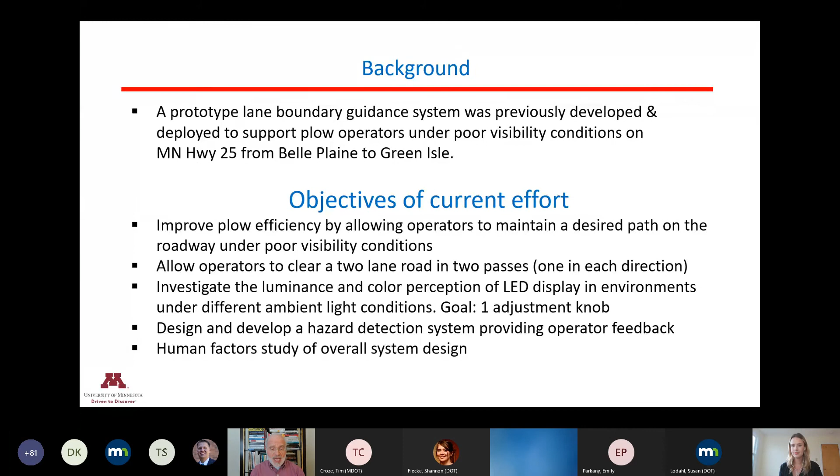This newer version essentially still has a differential RTK GNSS system. We are picking up correction signals from what's called the MnDOT CORS system, continuously operating reference stations. There are about 100 plus reference stations across the state of Minnesota that will provide us with accuracies on the order of a few inches. We've reduced the cost of the computer. We're now using a Raspberry Pi, which you can buy at Amazon for under $100. So we've brought the cost down quite a bit.

But I tell you something, the Trimble receivers that we're using are still very pricey. But we've recently tested and evaluated a newer system that cuts the cost of that by 75%. If I can have the next slide, please.

These are the components of the systems that were being run on Minnesota 25. I can't control the cursor, but on the upper left, you see an antenna from the GNSS receiver. The LED displays on the dash in the lower left. And the yellow box on the right, that's that receiver. If you went out and bought it today, that would cost you $16,000 for that little yellow box you see there. Trimble wants to get paid for their technology. And I want to let you know that we've evaluated a competitor to Trimble, and we find that it's just as good for about $4,000. So we think we can drive the cost of everything down quite a bit.

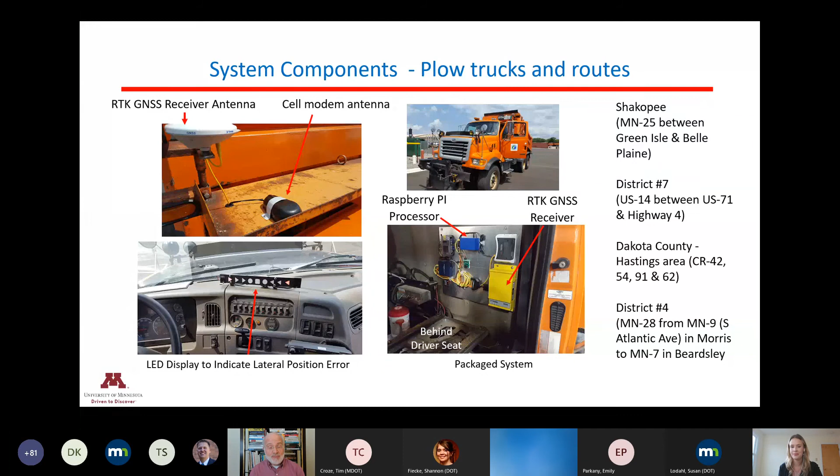If I could have the next slide, if we can click that again, you're gonna see LED operation. These are different colored LEDs and different shapes. The green represents being in the center of the lane. If you move 1 foot over, different LEDs are triggered. So each LED represents 1 foot of lateral movement. The truck is now going to move over into the opposing lane. And you can see that the driver is being warned that they're in the opposing lane and they drive back into their own lane. If I could have the next slide,

color is a huge deal, and different colors have different effects depending upon ambient conditions. For example, green is uncomfortably bright compared to red at night, but during the day, green is too dim compared to the brighter red. So at different ambient light conditions, different colors have different effects, and the operators wanted one knob, but we can't just fix it with one knob.

So we developed a series of experiments with human subjects, literally a black box where we enclose people in different ambient light conditions to see how they reacted to different colors. And we developed some equations, if you will, that we programmed into our computer. So we controlled each color independently of each other color for each LED, and we would change it depending on ambient conditions. So it would be different at night and different during the day, and the operator had only one knob that they needed to worry about. So that worked really well, and we've deployed that in the system that we're evaluating now on 4 different plows. If I could have the next slide.

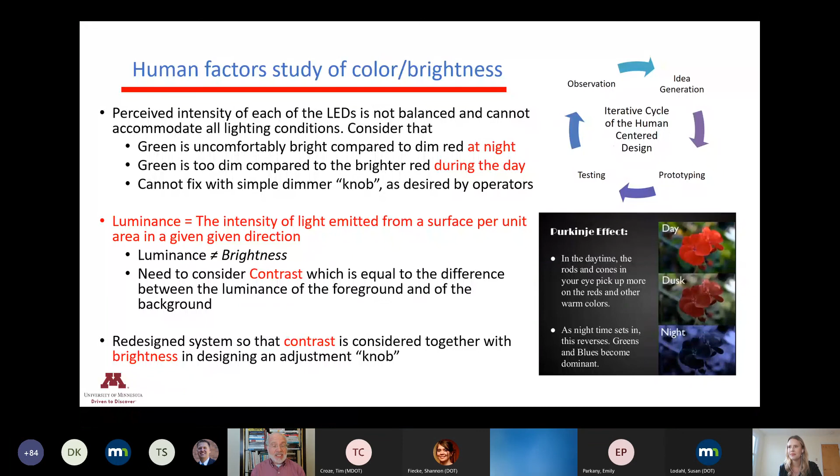There are 4 plows deployed now, 1 in District 7, 1 in District 4, 1 in the Shakopee area, and 1 in Dakota County. On the upper left, you'll see a radar mounted on the L bracket. The 2 antennas are on the side. Just below, on the left, you see the new LED display. And besides these colored LEDs at the bottom, there are 3 bars that essentially represent whether there's a hazard on the left, in the middle, or on the right lane. On the right side, you'll see that operators sometimes want the display up near the sun visor as opposed to being on the dash.

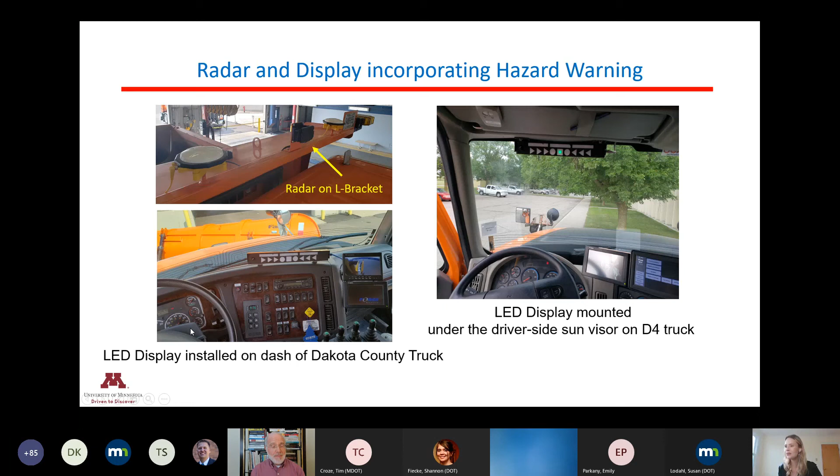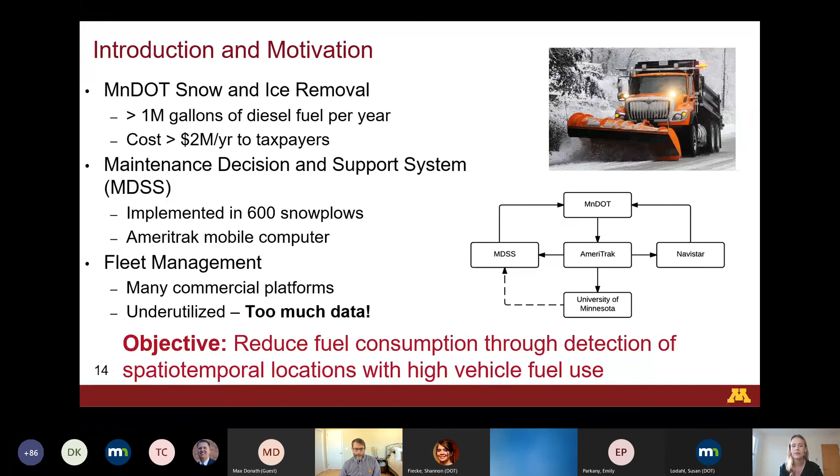So in fleet management generally, there's a ton of commercial platforms out there to do what we call telematics. Often the data are way too much for people to handle. So fleet managers don't have the time to scroll through terabytes worth of data to understand trends. So the purpose of our project is to interface with some of the data that are coming from these vehicles with the objective to reduce fuel consumption through detection of what we call spatiotemporal locations with high fuel use. So spatiotemporal just means in space and time. So the idea is that we will interface with data that comes from the snowplow in order to detect certain features about the roadway through the data that we're collecting. Okay, next.

So as part of our project, we're using the data to identify certain areas and times where fuel consumption is high. One of those particular areas is the issue of idling. MnDOT and MPCA have goals for reducing idling in vehicles and reducing CO2 emissions, respectively. So idling is of key importance and is considered low-hanging fruit in the fleet industry for reduction of CO2 emissions and fuel consumption. So right now, externally, MnDOT reports about 29,000 gallons of fuel consumed in idling in the 2017-2018 timeframe. If we define idle as being where the RPM of the engine is greater than 0 for greater than 3 minutes with 0 speed of the vehicle, we can identify from the data that we're collecting the times and places where idling is occurring in the fleet.

So we've collected a number of different data from different winters, from 2018 to 2020. In the 2019 season, we've collected a partial fleet from this season. We found that about 4.5% of fuel consumption is during idle periods of the vehicles. So about 4.5% of all the fuel burned is during idling, so essentially vehicles sitting there.

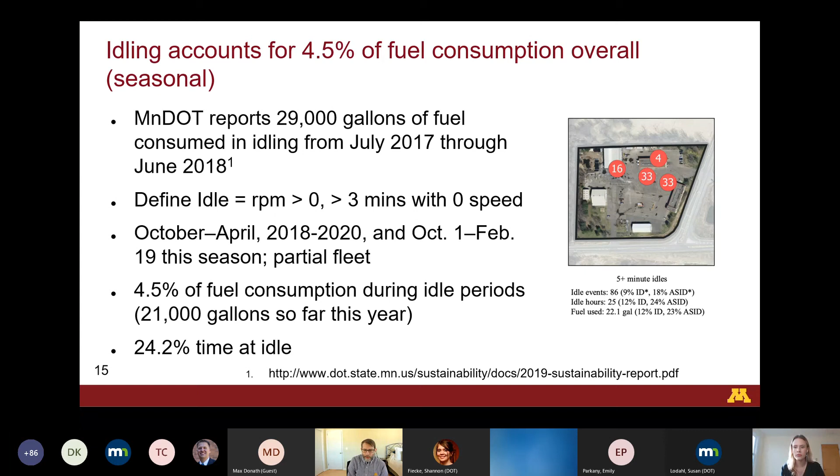And up on the right-hand side, you can see a figure where we've identified idling events over the course of a season, where these different places represent idling times greater than 5 minutes. And we've also done 3 minutes plus or 20 minutes plus, sometimes 30 minutes some of these vehicles are idling. So this is obviously an area where we can identify where idling is occurring and help the fleet manage where to reduce it. Okay, next slide, please.

But we considered only high activity days, meaning days where considerable snowfall was there, and also district aggregated weather observations. So we can show that if there's more snow, then there's lower miles per gallon. Now, what's interesting is that we can use this information that snowfall increases fuel consumption to look at specific locations where snow is highest. So you can go to the next slide, please.

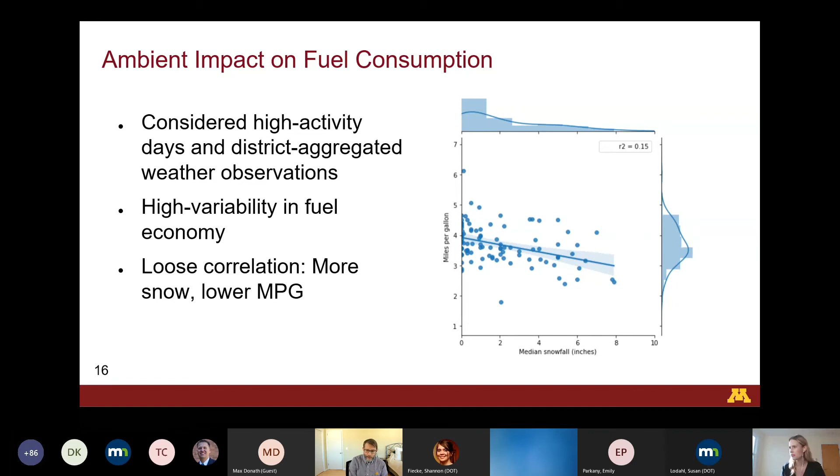So MnDOT has also already categorized some areas where there are snow traps, where there's excessive snow. We can actually correlate fuel consumption with the snow trap locations in individual vehicles, such that we can identify what fuel is consumed in the snow trap areas. We're working on this right now, and we don't have exact quantifiable numbers as to what the increase in fuel consumption is due to snow traps. We can categorize that, or we can do the reverse, which is use the fuel consumption to figure out where snow depth is high.

And so this is something we're working on towards the end of our project with the current winter data, though we haven't had too many snowfall events in Minnesota this winter, but I think we can still get something interesting out of it. And winter's not over yet, I'm sure.

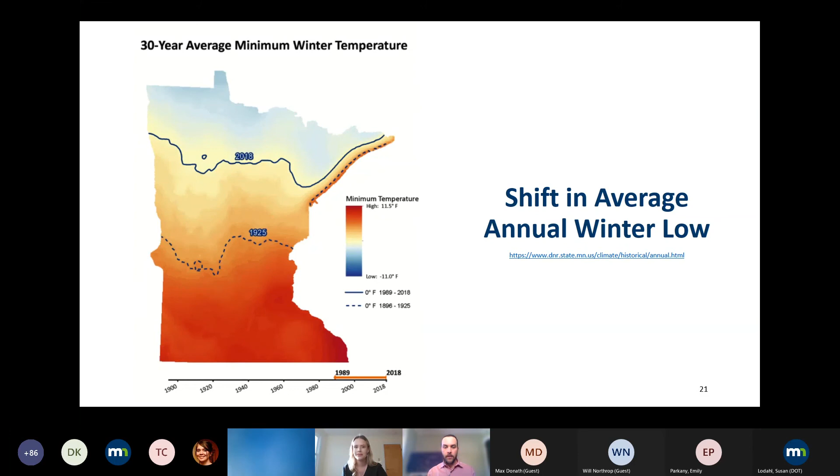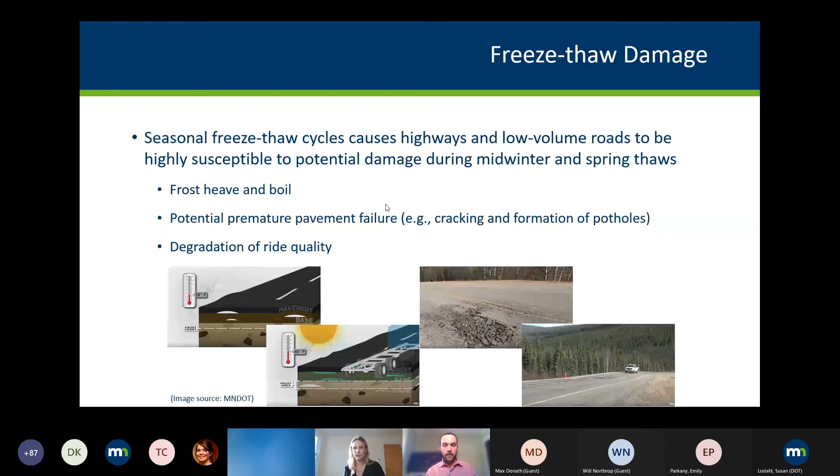And so the overview of this research, really the focus of what we're trying to do, we're still in the middle of it. We're maybe a month or two from wrapping up this phase 1, but pretty excited to see what we're going to get from it. So have Minnesota winters increased the number of freeze-thaw cycles? Phase 1 is looking at a lot of that existing data. So mining the last 40-ish years of data that we have at MnROAD, which is our research station, where we've got temperature gauges and freeze gauges, moisture sensors, all that stuff.

And those are really important because what a freeze-thaw cycle is, how you define it and track it, changes depending on soil type as well as moisture content. Those are two of the key variables, though they're not the only ones. So we've got really good data on air temperature, how that's changed over the last, say, 50 years. But correlating that to how long it takes certain pavement types and sub-pavement types to completely thaw and then refreeze will be really valuable for us to then quantify how those patterns have shifted.

And so we're working with Iowa State University and some researchers there, and you'll see their name at the end, to do some big data analytics using some algorithms and computing power that they have. And then phase 2 will be collecting, I'll say, ground testing and evaluating the accuracy of those models that were created in phase 1 based on historical data. And we expect phase 2 we would basically kick off this summer.

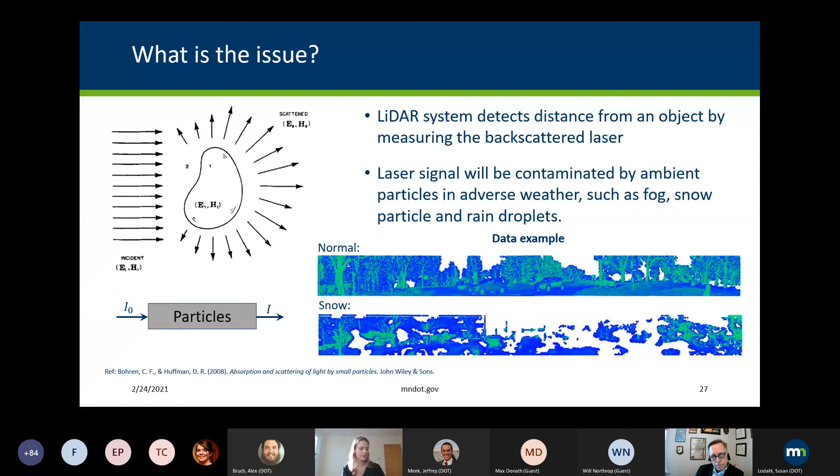So as I stated, Minnesota's got all these different types of environments and types of precipitation. And all the suspended particles that we have in our environment have different properties. So if a light hits this particle, it's going to have different detection, okay, and it's going to have a different backscatter of that signal from the laser. And then you can see that the images on the bottom of the slide kind of show you a little bit of what the camera sees on the instruments that we use, both in the normal and in the obstructed environments. And next slide.

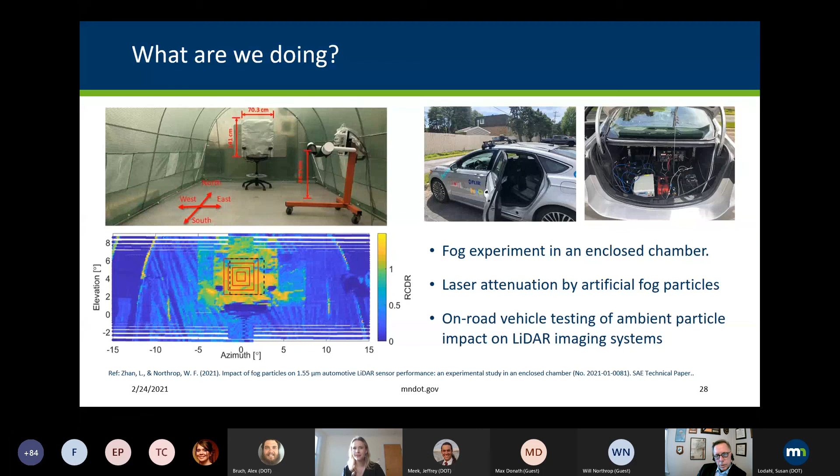And then for the second experiment, it's outdoors. And all this is done locally too, where there's one lead vehicle that's got a roof-mounted opacity instrument. And then there's the following vehicle, which is equipped with a LiDAR sensor on the roof. So the lead vehicle measures the concentration of the particles, and the following vehicle is behind that vehicle, and then the LiDAR images in that following vehicle are examined for whatever we're trying to do there, and what the impacts on the systems are. So if you go to the next slide.

So what do we hope to learn? Well, I guess the university would say that we're trying to do this to determine better practices so that we can get a better model, so that we can train, we can educate our students better. But if we go a little bit even farther than that, we hope that it cultivates better experiences on the road for anybody that's in an automated vehicle, to include maybe regulations, policies, and safer systems that we use. And that probably sums that up.

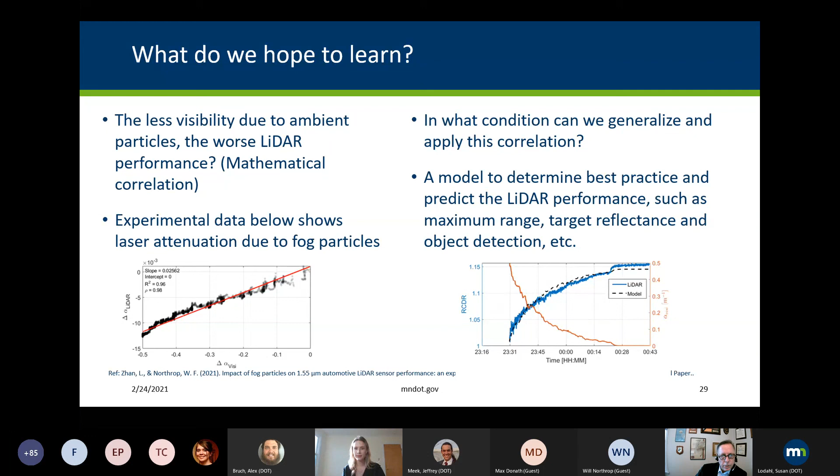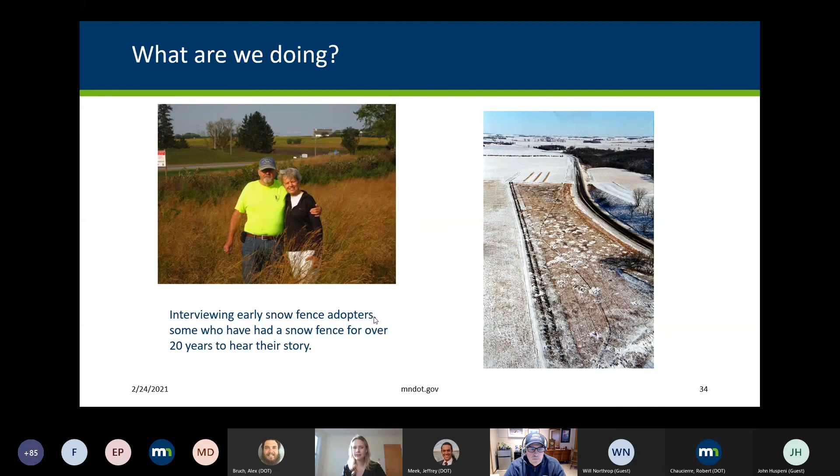We wanted to learn from them what motivated them, what was their motivation of becoming an early snow fence adopter, and were they adversely or positively impacted by the snow fence?

Oftentimes we hear from landowners who have never done a snow fence and we approach them about it. They are concerned about that snowdrift that's sitting in the field and thinking that may delay their planting in the spring. So with this research project, we're reaching out to landowners that have been doing this and finding out, have their yields been adversely impacted?

This type of information will be very helpful for us when we're figuring out our compensation, whether we're compensating them through a rental agreement for having the snow fence out there, or when we're buying an easement to have the snow fence out there. It can help our right-of-way folks do their negotiations, and it will also help us better articulate when we're approaching a new landowner what they can expect.

The other thing we want to get from this project is advice to consider - what advice would they give other landowners about adopting a snow fence? Oftentimes some of our best marketing is going to be farmer to farmer, sharing their experiences with one another and trying to learn from that.

As well as getting advice that could help us when we're designing snow fences to be better designers, helping our maintenance staff. Our maintenance staff does a phenomenal job of recruiting farmers to leave standing corn rows each year.

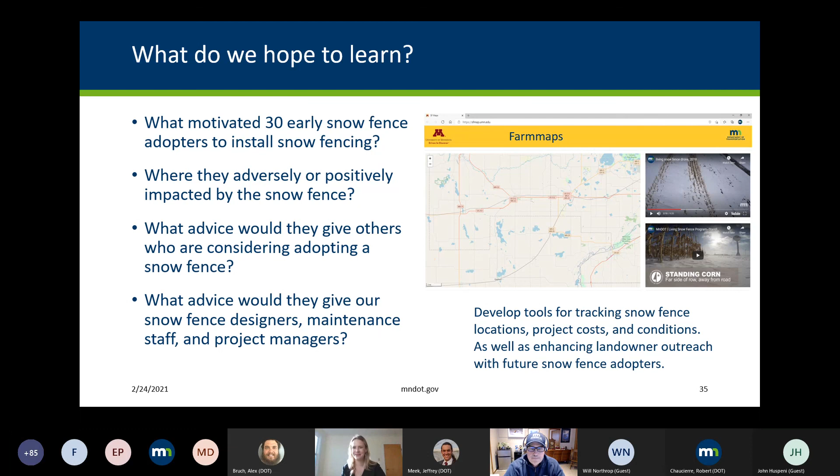We're probably going to be wrapping this project up in November of 2021. A lot of the heavy lifting is happening between now and July 1st, and we're looking at doing some training after we get more results from these 30 landowners. We'll be doing virtual training with the University of Minnesota, something to watch for coming up probably during May and June, to learn how we can better work with landowners.

All right, thank you, Dan. I thought that first snow fence looked really familiar - it's right by my grandparents' house. I've driven by so many times.

So those were our 5 projects we're highlighting today, but there is a lot more winter research going on. If you're interested in learning more, I'd urge you to check out the projects listed on our website at mndot.gov/research, the Clear Roads website at clearroads.org, and the Office of Maintenance, which you can access at mndot.gov/maintenance.